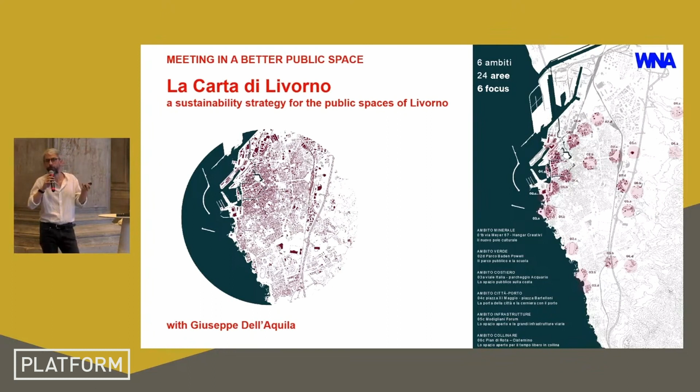This is not a matter of urban design, but more a method, a strategy to fix some points on the public space. So first the analysis, an evidence-based analysis, then the exploration of scenarios, again with evidence-based evaluation, to obtain comfort for the users and quality for the city.

So we created a kind of tessellation of the city with 6 main areas, and inside these areas there are a lot of typologies of public space.

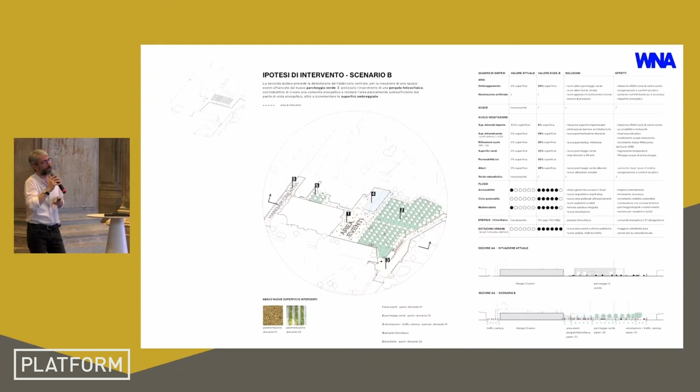For instance, this one is a parking that we turned into a more sustainable and comfortable parking, and also an event space. But it's not a matter of shape and design, it's a step before the design — a method to inspire the tender for public documents, and also the competition for the next phases of the design aspects.

So it's quite simple, the analysis, and it's a kind of evaluation on the comfort and on the metabolism of this space — the drainage, the heating island, the presence of green, the shading system, and so on.

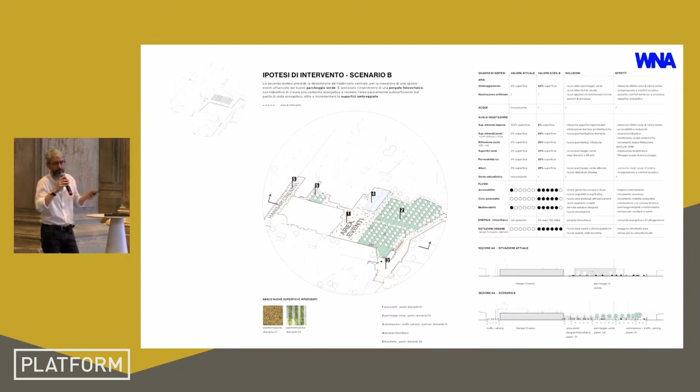After the evaluation, we developed 2 scenarios, and for each scenario there's of course another evaluation. In the first image is the space as is, and the second is the first scenario with the drainage system, more interconnected mobility, shading system, and new materials that are more sustainable for the city.

Of course, nature-based solutions are part of this scheme, and this is another example of this renewed parking.

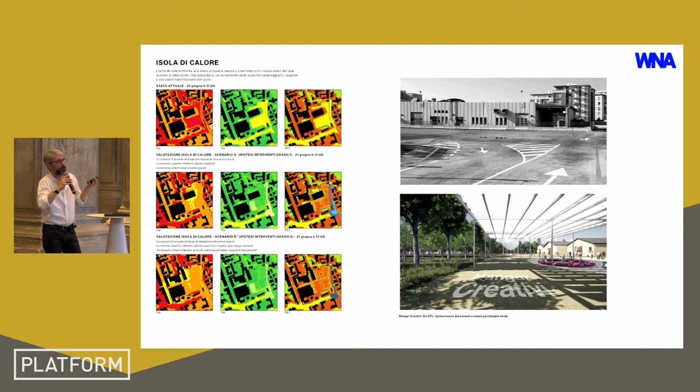The heating island is another aspect that we analyzed, and we used this ENVI-met software to test the perception of the users. So it's not only a matter of materials and abstract aspects, but we started from the real perception of the people.

Second project is related to gardening and living in a park with bees. We all hope to be there in some way. We started the building site 2 months ago, and the task is to create a park for honey production with didactic and leisure facilities.

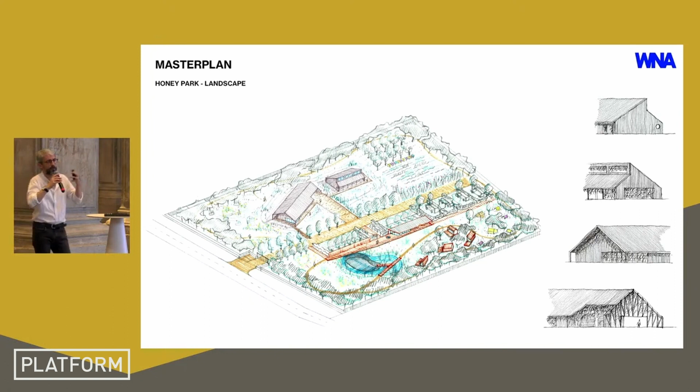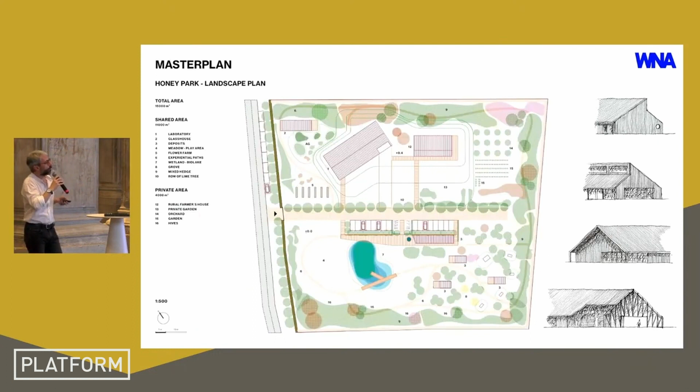There are some lodges where you can sleep with bees, and some other facilities like an open kitchen, sauna, and so on. Then we developed the landscape with Marta Mariani, landscape architect, creating an environment friendly for the bees, especially with a melliferous plant system.

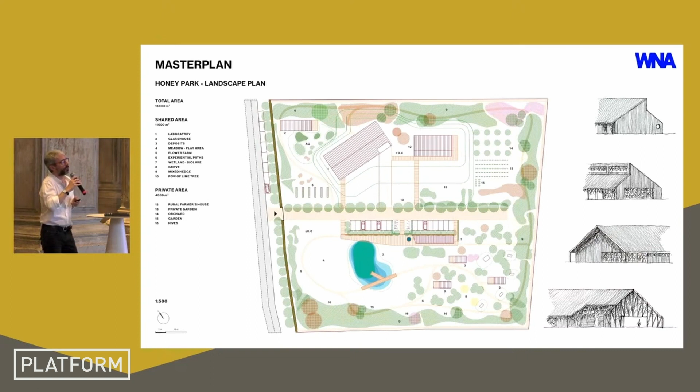About the buildings, all the typologies are related to typologies present in the context — stable, very simple volumes, and very easy and quick to build.

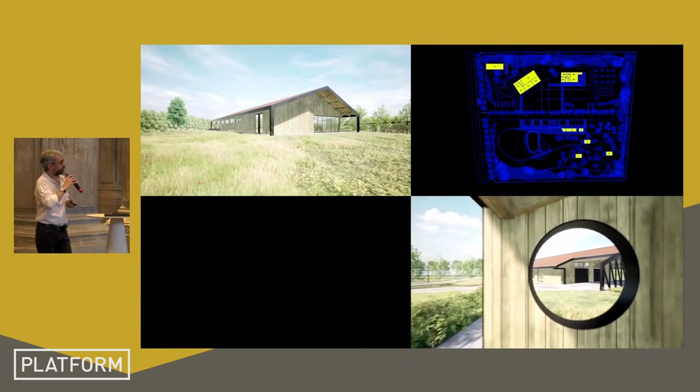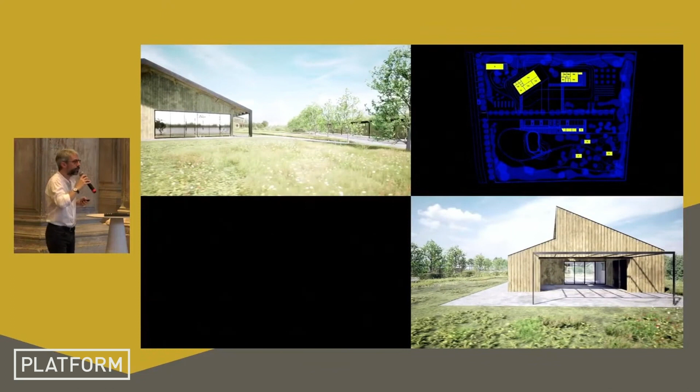There are some videos — the one on the left is the laboratory where the honey is produced, and on the right is the house of the farmer, related to the private space.

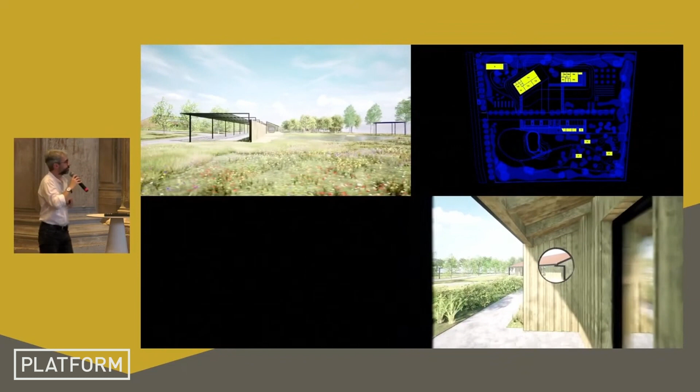And there's the bio pool in this view.

So the last project is related to learning in a flexible design school. We developed this project in 2019 and 2020. The brief was to create an open learning environment with a very innovative didactic approach.

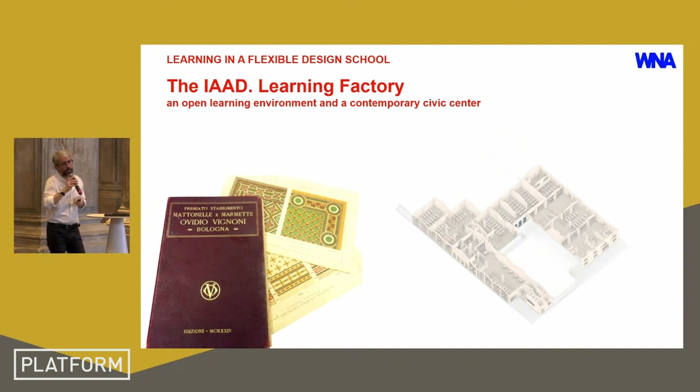We were lucky to be involved in this particular building. It was a former factory, early 20th century, and they realized in this factory decorated tiles. So it was quite inspiring, all the spaces, and we tried to maintain the atmosphere of part of this use.

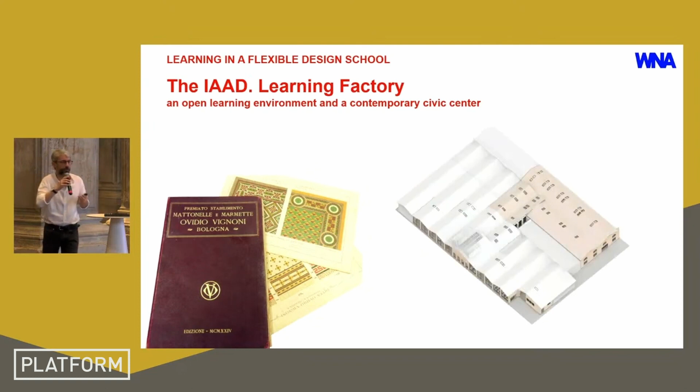As you can see from the axonometry, the space is quite wide, and we intended this space as a kind of covered square.

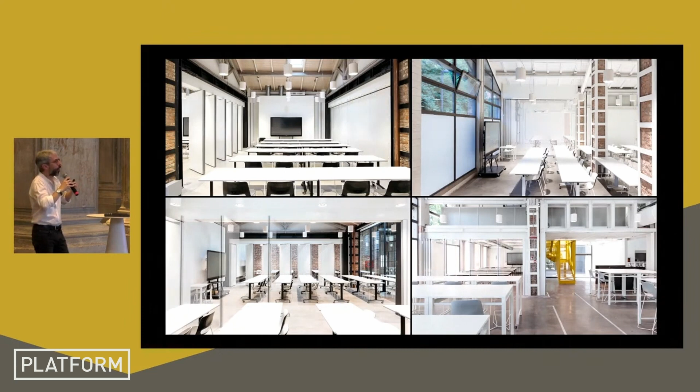So with a few standard classrooms and very open and flexible spaces with movable walls, and the possibility to share knowledge and meet people in a quite open environment.

40% are the closed classrooms, and the rest is an open space that you can colonize upon your needs.

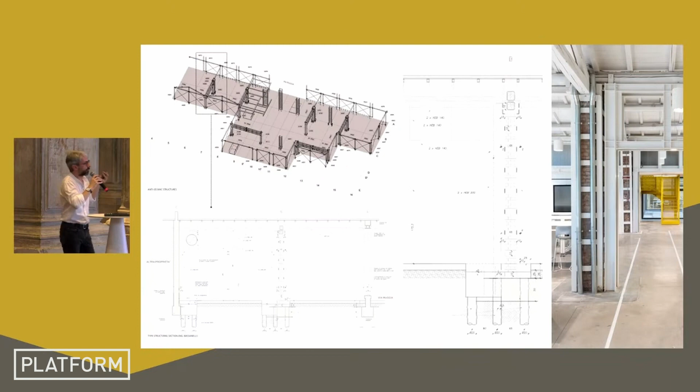The structural aspects were quite important because we needed to create a kind of seismic adaptation, and we took this opportunity to create a new layer in the existing space.

So this space is not only for didactic purposes, but is used as a kind of civic center. They created events with artistic exhibitions, workshops, and presentations during the night.

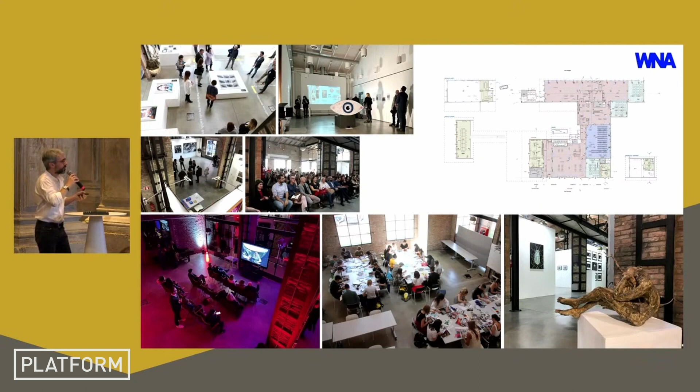So just to resume, New Together is meeting in a better public space, gardening and living in a park with bees, and learning in a flexible design school. Thanks for the attention.